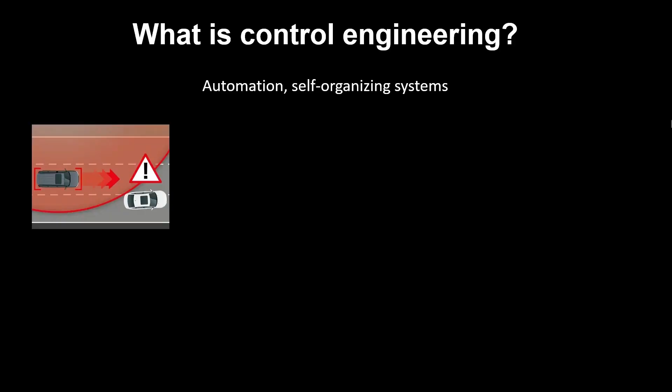Another example is the autopilot. We don't fly anymore with a pilot changing the altitude or the direction of the aircraft manually - this would evoke and hide many dangers. But what do we have? We have the autopilot that takes the information from the GPS and the altimeters - these are sensors, by the way - and it redirects the aircraft, adjusts the speed, the height, etc.

And the last one is a thermostat, which we have in our houses. You give it a desired temperature as input, let's say 22 Celsius, and the sensors of the system will measure the room temperature every time. If it's above 22 Celsius, it will turn on the cooling system. If it's below, it will turn on the heating system. This is how it works - you don't have to adjust it every time.

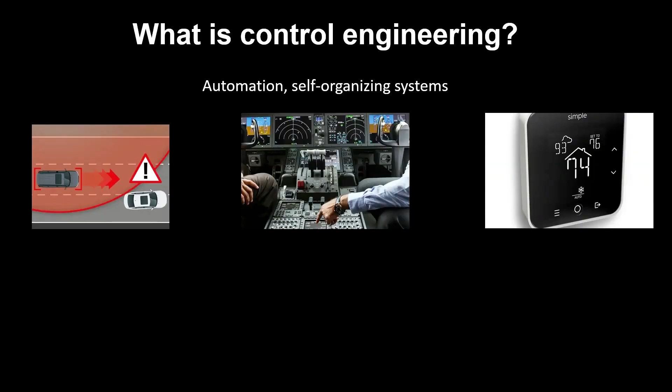Now, talking about these three examples of systems that have embedded control systems within them, I hope you notice that there is something all three of them have in common - this is the parts of the control system that they have integrated. A control system comprises these parts.

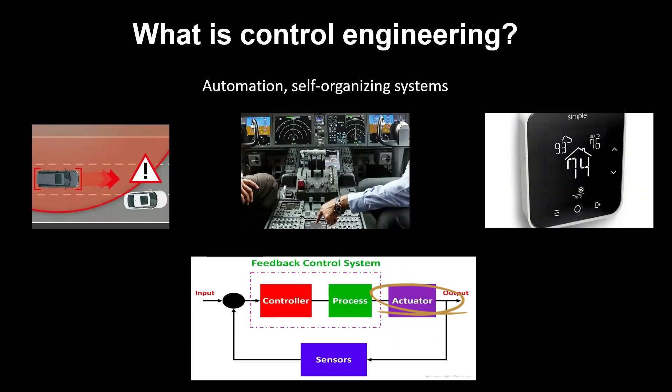You have the input - this is set by the human: desired speed, desired heat, desired direction. Then you have the sensors that collect and keep track of the information of the system - your position, your current speed, your current temperature. Then you have the feedback control system, the controller, that compares the information of the sensors with the desired input. And if they see they don't have the desired one yet, they try to change it. Then you have the actuator that takes the order from the controller and actually does the work, changing those measurements to adjust the system.

Do we use control systems in industry? Of course we do - we could never achieve that high production without automation. Humans cannot create mass production based on their own abilities only, so we definitely use automation.

Are you familiar with motors? Motors are very cool - they actually convert electrical energy to mechanical rotation. And my question for you would be: are motors control systems?

I'm asking this because, as an undergraduate engineering student, I have suffered understanding the difference between actuator, controller, and control system, because they don't explain it, man. They never do. They focus on the mathematical part of control system theory, and they don't elucidate the parts of the control system. But I want you to understand.

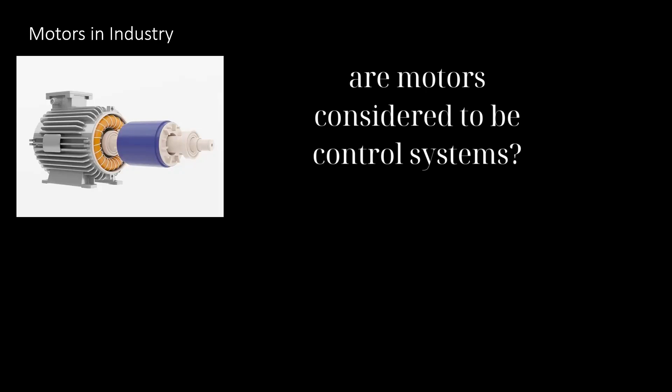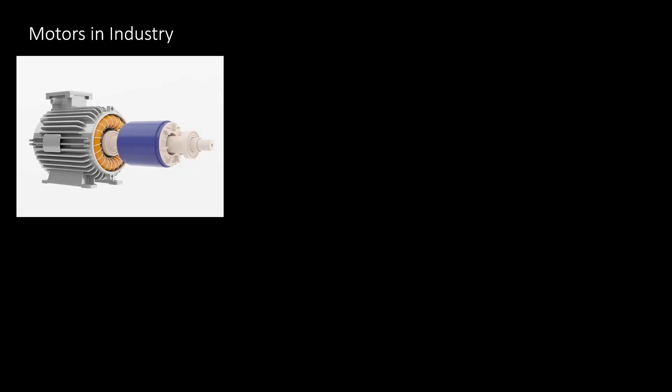No, the motor is not a control system alone. A motor is an actuator. It can be a part of a control system if we are able to change and adjust its rotation by controllers, computers, and sense its speed by sensors, encoders, and change the input voltage by inverters and drives. And that would actually be how we manage the frequency of robotic arms.

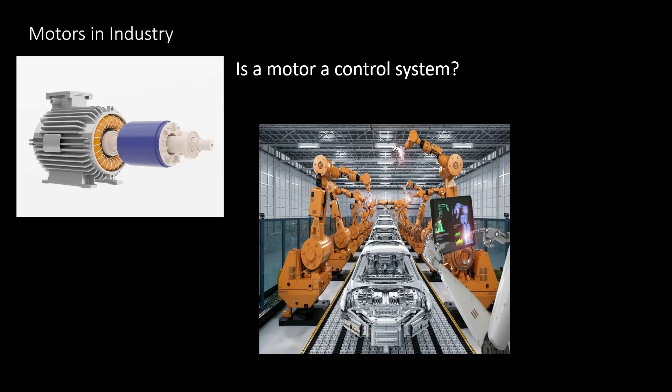We do that with motors. We do that with a control system that involves motors. We're able to type a desired frequency of a robotic arm, and sensors, controllers, inverters will do everything to adjust the right rotational speed so that we have the right frequency in the robotic arm. Yeah, this is definitely a control system. A motor alone is not.

Since we now have a big picture of what control engineering is, what it concerns, and we're able to also recognize a control system and its parts, let me take you back in human history and tell you how it all started. Control engineering and automation actually started in the 3rd century BC in ancient Greece by some great figures, mathematicians, and inventors who based their whole automation philosophy on substances like water, fire, and wind.

So the first one I will talk to you about is Ctesibius. Ctesibius was an inventor and mathematician. He lived in the 3rd century BC, and he mostly created automatic systems based on water regulations.

The most famous invention by Ctesibius was the so-called water clock. A fun fact about this water clock that was working based on a water regulator was that it remained the most precise time measurement system until the 17th century. Isn't that crazy? The water regulator of the clock had a very simple design, as you can see in the picture.

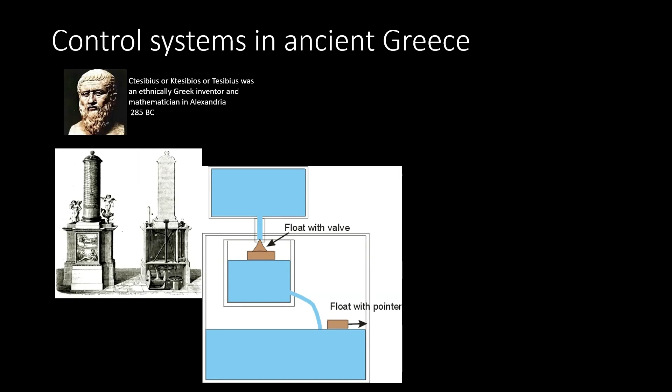It was actually based on two containers. The upper container slowly poured water into a lower one, as you can see. The lower container had both an inlet hole and an outlet, and it would allow water to enter and leave continuously. Inside it, we see that it had a floating mechanism that automatically adjusted the inlet. When the water level rose too much, the float partially closed the inlet, and when the level dropped, it opened again. That way we could have the water level constant.

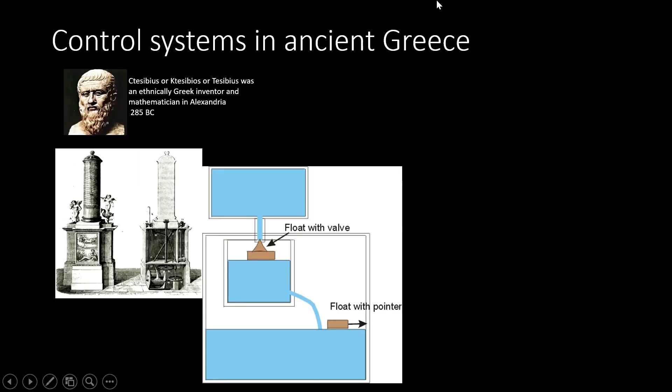That constant water level meant a constant outflow of water, and the steady outflow moved the pointer at a steady rate. That pointer was actually indicating the time, as you can see in this picture as well.

Genius, isn't it? So the next gigantic figure in control system history is Philo of Byzantium. Philon was an ancient Greek engineer who lived in Alexandria, and he based his automation logic mostly on air pressure and liquids. He followed the very simple physical truth that liquids can flow only if air replaces them. No air, no flow.

Inside, there were two sealed containers, one with wine and the other with water. As soon as the valve opened, air was allowed to enter the containers. This prevented a vacuum from forming and allowed gravity to do its job. First, the wine was pouring, and then the water in a controlled proportion, and then through the jug into your cup. When you removed the cup from her hand, the valve closed again, and the system sealed itself, and the flow stopped automatically.

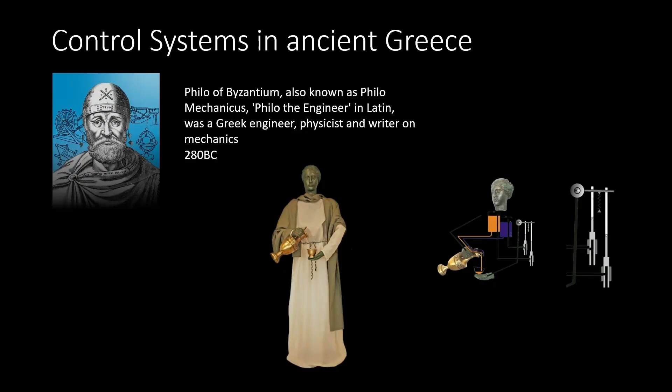So this was basically the first robot in human history. No human intervention, no electronics, no motors, just basic physics logic.

Heron of Alexandria. Heron lived in the first century AD. He was a mathematician and an engineer who lived in the Roman Empire, and he was Greek in nationality. As I said in the beginning of the video, this guy is the father of control engineering as a field, not only because of his inventions focusing on being automatic and self-manageable, but because he wrote a book, Pneumatica, which collected the wisdom of automatic systems, his inventions, and also inventions of former centuries in history from previous inventors, engineers, mathematicians.

And this is how we actually know about Ctesibius and Philo. Otherwise, we wouldn't have record of their automatic systems. So he devoted his life to writing this book.

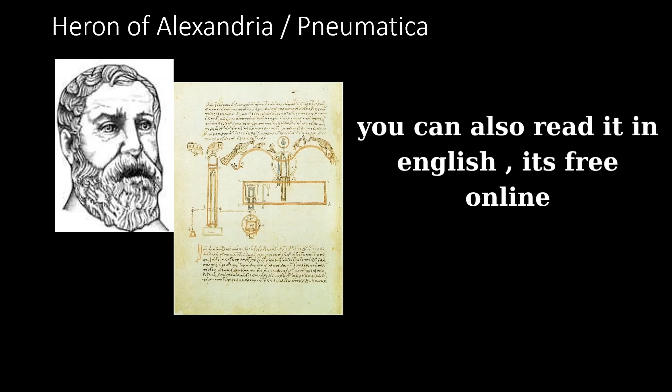If you are an undergraduate engineer, I encourage you to read that in ancient Greek or in Latin if you can, because it is admirable that he focuses on describing in detail the controller parts of the system, not just the performance and the actuators. He focuses meticulously on the controllers, what happens in the controllers, and this is why it is a very interesting and unique experience if you really read it.

I want to accentuate some parts of the book that define it as the foundation of control engineering. I would like to underline some parts of his book Pneumatica that indicate he really wanted to define what control systems are. He actually came very close to that definition.

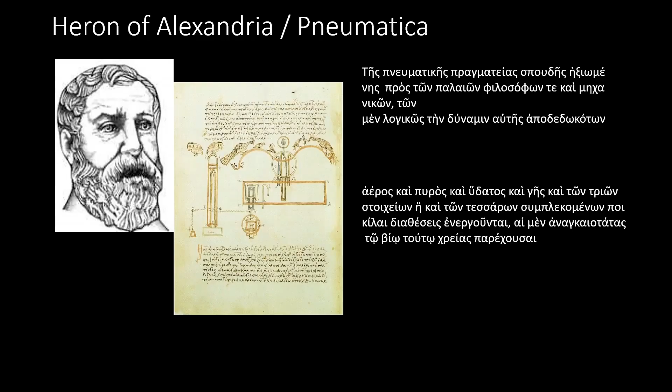But what he actually means is that when you combine those elements together, you create a system that is self-organizable, it's self-manageable. You create something that can be manipulated. The outcome of the combination of these elements can be manipulated. So he definitely wanted to come close to the definition of control. And he did, and we're thankful for this.

Heron created many control systems, mostly based on water and fire regulators. He also played a lot with wind pressure and stuff like that. But I chose to describe one of the most famous control systems from his book Pneumatica, which is the so-called Heron's Temple door opener, and this has, in my opinion, a very funny and interesting historical background.

We are in the first century AD in ancient Greece, where people gather in temples and sacrifice animals on altars in front of temples for Apollo, for Zeus, for Athena, and they ask for mercy, prosperity, success. They do this sacrifice to get something from the gods. And something extraordinary happens: as soon as the fire is lit on the altar, the temple doors open, and after some time, they close again.

From the worshippers' point of view, this was a divine sign. This was actually the proof that the gods accepted their sacrifice. It felt like magic, like a miracle. But the truth is that it was not. There was no miracle, and we are not pagan anymore. The answer is that the illusion was actually caused by an underground mechanism, an underground automatic control system designed by this cool, wise guy, Heron of Alexandria.

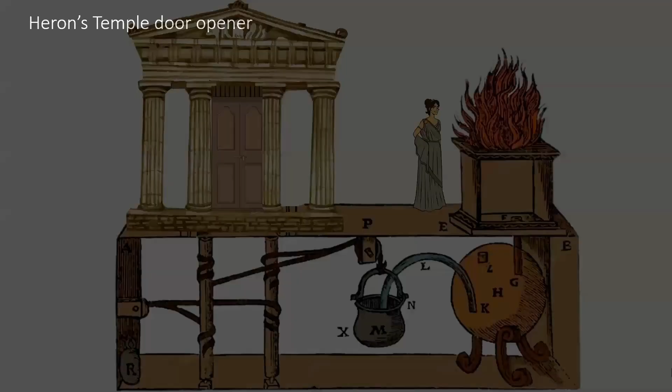So let's see how that mechanism actually worked. The worshipper lights a fire on the altar in front of the temple for the sacrifice. The fire heats the air inside a sealed chamber that cannot be seen — it's actually underground, beneath the altar. As we have an increase in temperature, the air pressure inside the chamber also increases.

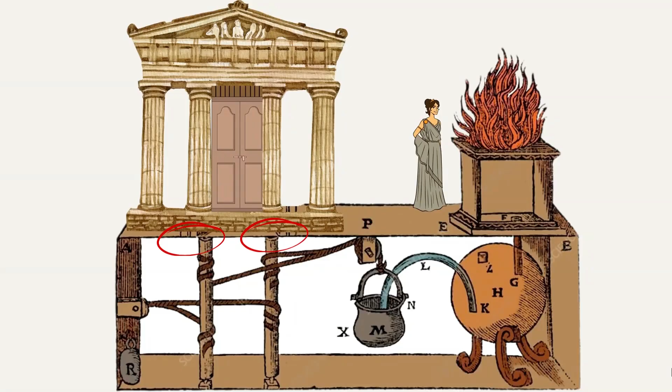That increased air pressure pushes water from one sealed container to the other container. The second container becomes heavier as it's filled with water, and with gravity, the weight pulls down the system of ropes and pulleys, which are also connected to the doors. Because of gravity, the doors open automatically.

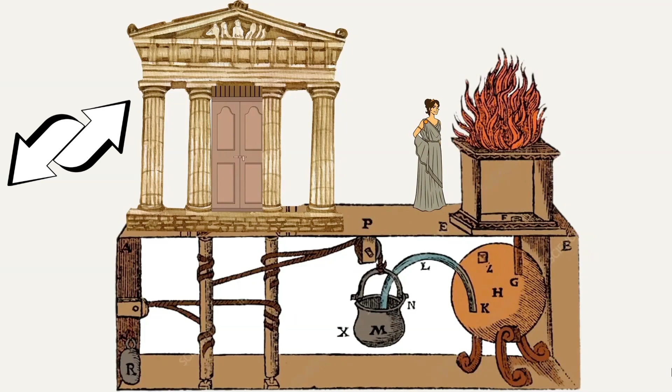Now we have the reverse procedure when the fire goes out. The air cools, we have a decrease in pressure so the water can flow back. The weight system reverses, and we have the closing of the door. The door is always connected to the pulleys and the ropes. So this is how it's actually achieved.